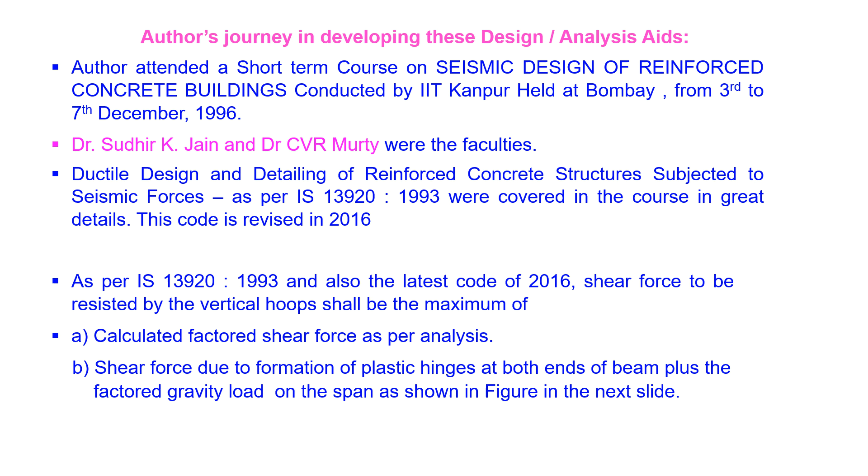As per IS 13920-1993 and also as per the latest code 2016, shear force to be resisted by the vertical hoops shall be the maximum of calculated factored shear force as per analysis, and shear force due to formation of plastic hinges at both ends of the beam, plus the factored gravity load on the span, as shown in the figure in the next slide. Of course, this picture is taken from IS 13920 code itself. So this states this is 1.2 load factor, dead load plus live load is a UDL shown on the beam.

So shear force due to gravity loads is 1.2 load factor, dead load plus live load divided by 2 because it is UDL. Both the reactions RA, RB will be equal, and the shear force due to dead load will be 1.2 times dead load plus live load divided by 2. Now, in addition to this, we have to consider VUA.

Shear force at A is equal to shear force due to dead load plus live load minus 1.4 times sagging moment of resistance of the beam at A plus hogging moment of resistance at B divided by span of the beam LAB. And this is for sway of the beam towards right.

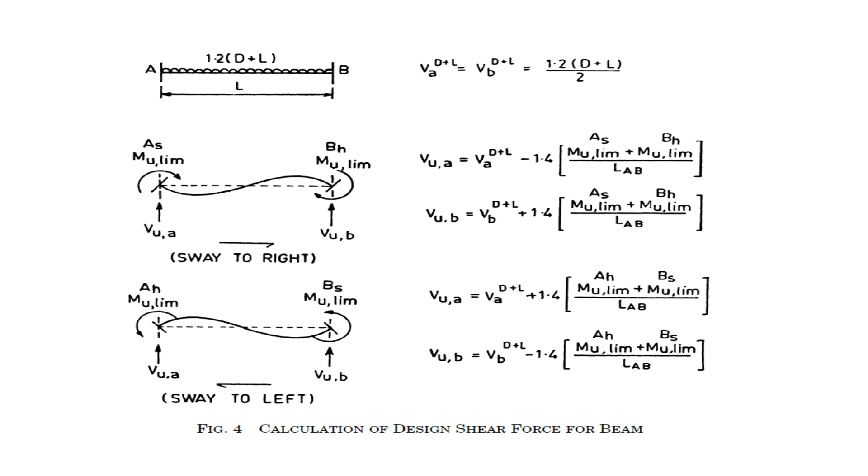And shear force at B is shear force due to dead load plus live load plus 1.4 times sagging moment of resistance of the beam at A and hogging moment of resistance of the beam at B divided by the span. Similarly, for sway to left, these are the formulae.

For a query on how to calculate sagging and hogging moments of resistance of the beam section at the ends, it was indicated in the short course that no ready-made references are available for it. One has to devise their own method for calculating the moment of resistance of the beam sections. At this juncture, author's job profile demanded structural design of buildings in J&K area, northeastern states, and many of the work sites were in seismic zone 4 and 5 where IS 13920 was applicable.

Normally, the beams are designed for factored design moments obtained from analysis, and the main reinforcement of the beam is provided accordingly. Beams may be designed as singly reinforced or as doubly reinforced depending on the cross-sectional dimensions of the beam which are chosen. After calculation of area of steel required, diameter of bar is selected and number of bars will be decided. Some amount of rounding off happens invariably in design of a beam.

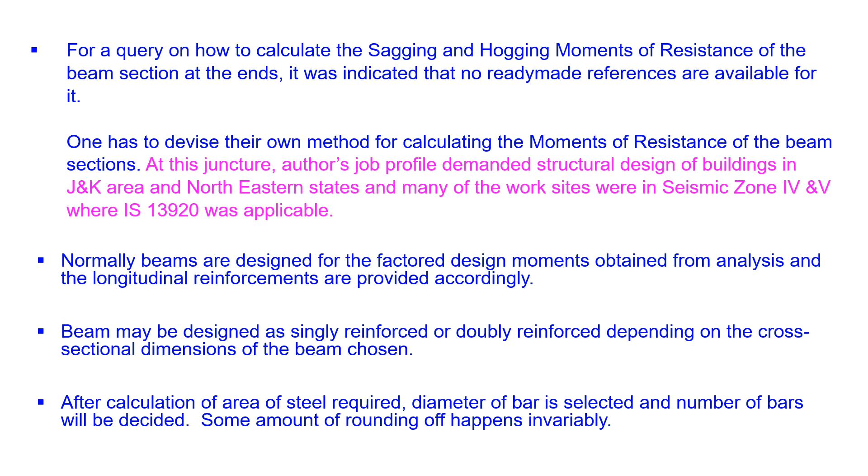Even when beams are designed as singly reinforced beams, reinforcements are provided on compression side of the beam also for holding the stirrups. And in fact, any beam is a doubly reinforced beam if we consider hanger bars which are provided for holding the stirrups. IS 13920 stipulates calculation of sagging and hogging moments of resistance of the beam at the two support sections in order to calculate the design shear force.

Procedure for calculation of moment of resistance of doubly reinforced rectangular sections for the actual reinforcement provided was not found in most of the reference books and codes, and the author faced a challenge. Author developed a computer program for calculation of moment of resistance factors of doubly reinforced rectangular sections for the actual reinforcements provided. Results obtained from computer program are validated and compiled in the form of tables.

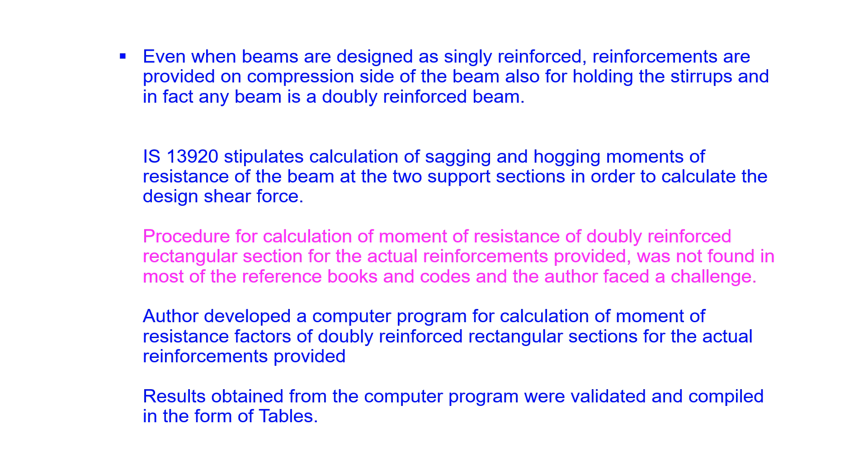And these tables were sent to Dr. Sudhir K. Jain, who was a faculty for the short-term course on seismic resistant design of buildings. And Dr. Sudhir K. Jain appreciated the efforts taken by the author in coming out with such useful design aids, and he sent an email to the author with a copy to Dr. R. K. Ingle of NIT Nagpur with a request to review the values. Email received from Dr. Sudhir K. Jain is in the next slide.

Dr. Ingle opined that the tables prepared by the author are very good and quite accurate compared to SP16 tables. Email received from Dr. R. K. Ingle is also in the next slides. This is the email received from Dr. S. K. Jain, and the last paragraph reads as, I am hopeful that your work will receive due acknowledgement from the structural engineering community in the country.

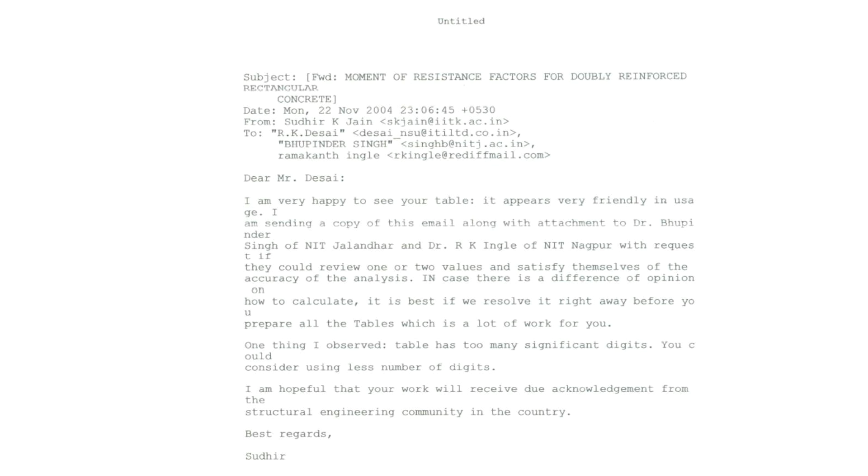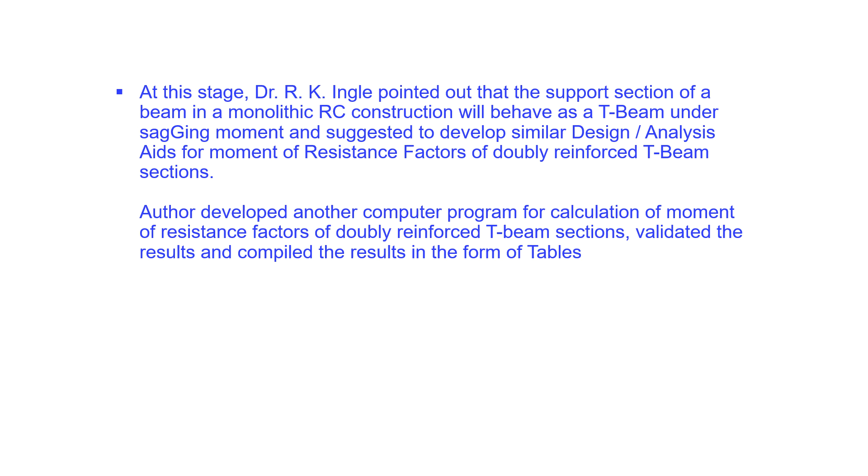So author followed the suggestion of Dr. R. K. Ingle and developed another computer program for calculation of moment of resistance factors of doubly reinforced T-beam sections, validated the results and compiled the results in the form of tables. In the meanwhile, Dr. Sudhir K. Jain suggested to the author to contribute the design aids to the website of Structural Engineering Forum of India.

So author agreed for the same and sent the tables of moment of resistance factors of doubly reinforced rectangular sections to Structural Engineering Forum of India, and the same got uploaded on their website. These tables can be downloaded from SEFI's website using the following link. File name shown on the website is MR-Factors.xls. However, after downloading the file, it has to be renamed as MR_Factors.xls in order to view the tables using MS Excel software.

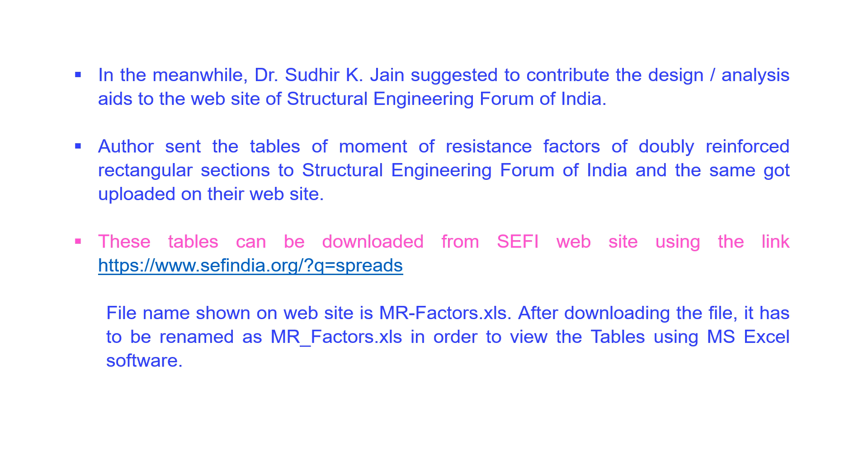Author proposed to publish the tables of moment of resistance factors of doubly reinforced rectangular and T-beam sections in the form of a booklet. At this juncture, author had a discussion with Dr. C.S. Vishwanatha, the then Chief of Torsteel Research Foundation in India, and sought his advice regarding publishing a booklet.

Dr. C.S. Vishwanatha opined that as IS 456 was revised in the year 2000, instead of publishing a book containing only the moment of resistance factors of doubly reinforced rectangular and T-beam sections, it is better to publish a comprehensive design analysis aids book. He also suggested to write to Bureau of Indian Standards requesting permission to publish such a book. Accordingly, author wrote to Bureau of Indian Standards requesting permission for publishing design analysis aids book.

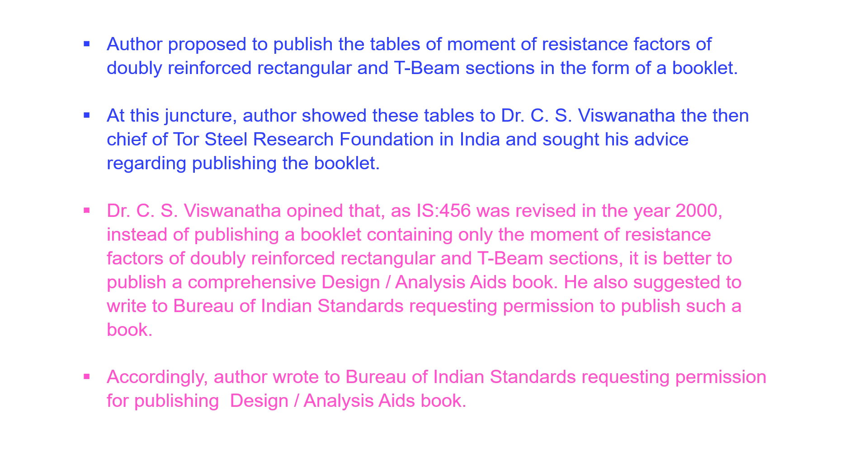Dr. N. Subramanian at this stage was in the process of authoring his book, Design of Reinforced Concrete Structures, and requested the author to accord permission to include the tables of moment of resistance factors of doubly reinforced sections in his book. Author intimated his consent for the same, and these tables got included in the book Design of Reinforced Concrete Structures, authored by Dr. N. Subramanian, and these tables can be viewed in Appendix C of the book, tables C7 to C20. Of course, the author of this book acknowledged the contributions of Sri R.K. Desai.

In this process, author interacted with Dr. N. Subramanian and discussed with him about his intention of authoring a comprehensive design and analysis aids book. Dr. N. Subramanian suggested to include design analysis aids for higher grades of concrete also, up to M55, in the design analysis aids book.

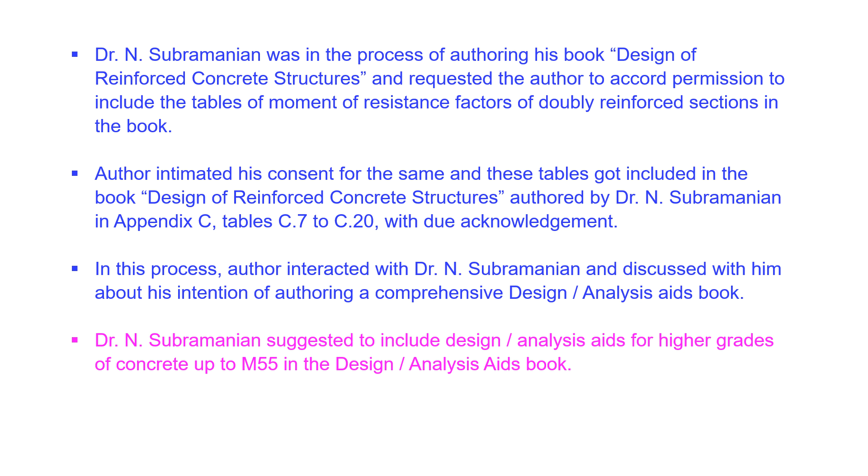Author had a discussion with engineer Ambrish G, director of Nixit Consultants Private Limited, Bangalore, about this book, who suggested to include design analysis aids for Fe 550 and Fe 600 steel also, as the usage of the same is becoming common. Author considered all the suggestions and continued his R&D work towards authoring a comprehensive design analysis aids book.

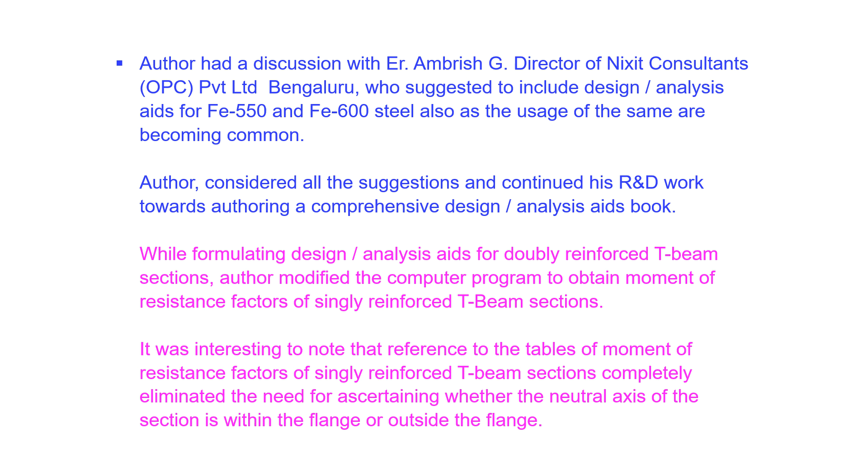While formulating design analysis aids for doubly reinforced T-beam sections, author felt that the computer program can be modified to obtain moment of resistance factors of singly reinforced T-beam sections. While doing so, the author found an interesting point. He noted that reference to the tables of moment of resistance factors of singly reinforced T-beam sections completely eliminated the need for ascertaining whether the neutral axis of the section is within the flange or outside the flange while designing singly reinforced T-beam sections. Author compiled all his findings and prepared the manuscript for publishing a comprehensive design analysis aids book.

Author tried publishing the book through Amazon, but there were some technical issues because of which it was not possible to publish on Amazon. Author and his family members, who are a team of structural engineers and software professionals, decided to publish the book and offer it for online purchase. The foreword to this book is authored by Dr. N. Subramanian, and author has obtained copyrights for the book. The author's family members developed a website where they hosted the details of this book.